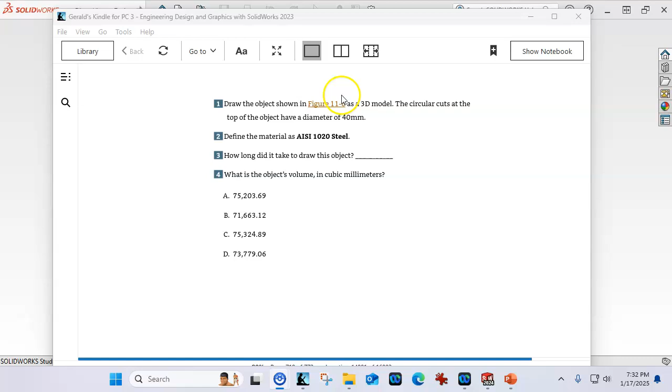So one of the things that comes up with the exam projects examples is that there are some things that have variation in size. So you could possibly, maybe these are 40 to start, and then the next question would be change all of these to 60 or shrink them to 30, whatever would facilitate the rebuild.

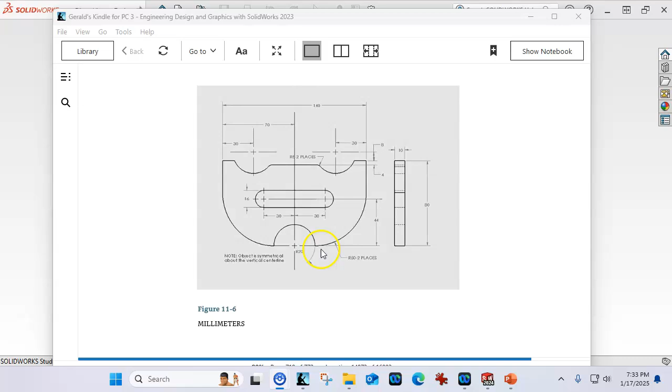All right, so we have a note that says object is symmetrical about the vertical center line, so we can draw half of it and mirror it. The slot would probably do a center point slot, and then the arc. So really the geometry that I want to create is going to be along the lines of this profile and then mirror it. So it looks like 80 on the height.

We've got an offset to that first level of 4, and then there is a tiny radius that I'm going to have to zoom up on the detail to be able to look at. Radius of 5 in 2 places. All right, so new metric part.

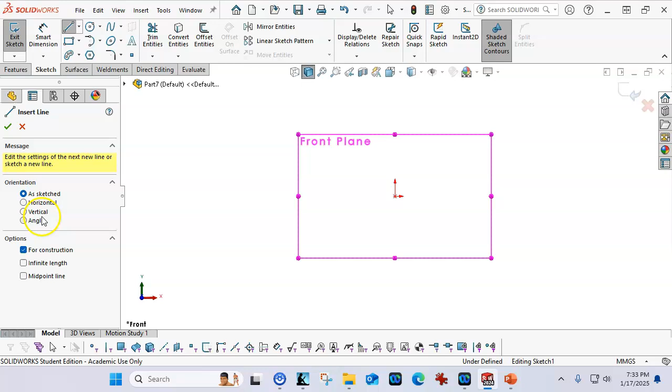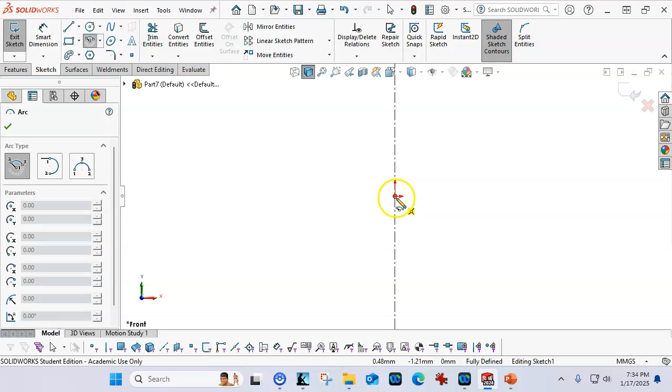First thing, whenever we're doing a symmetry or revolve, is we want to go ahead and just drop in that vertical center line and usually just escape out of it. This time we can go ahead and put in the center point arc to kind of get that started, but I don't want to take it further than that.

So I'm going to drop in a dimension real quick, that'll help me with the scaling, and the relation will go horizontal. All right, so coming out a little ways, don't know that it would be tangent. We're not really given a center point, but I think I will stay with that so that we can bring that up. And then it's going to go to lines, so L on the keyboard, and bring it up vertical, and then I can make those tangent.

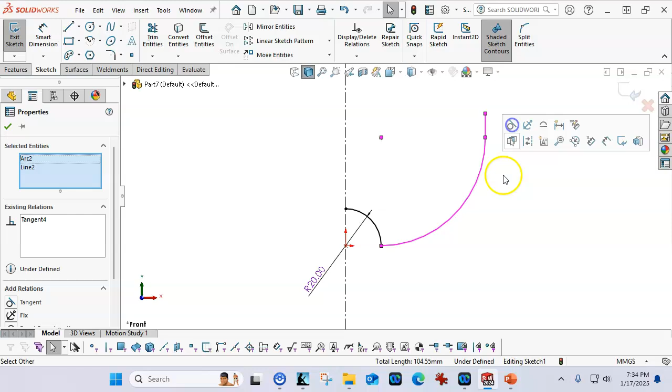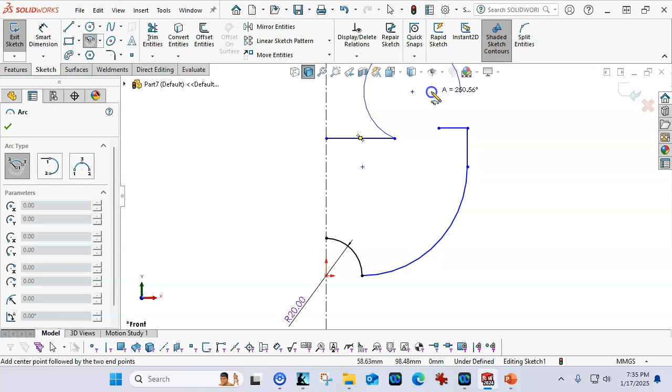All right, so that one's going to go all the way to the top, L for line again. Might as well stay in the line and bring over that segment. And we are given a point up here, so let's see if we can just go ahead and continue. So what I always end up doing with the center point arcs is if they go the wrong way, I just keep dragging them until I get it where I need it.

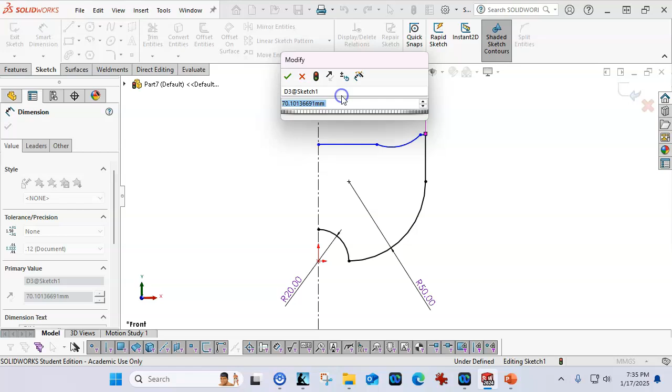All right, so radius of 50 on the lower. And then we were 70 off of the center line, so that's pretty close. We said the overall height was 80. So now when you get out of that, and we'll go back to base, so that's pretty close. And then 40 or 4, and we had a

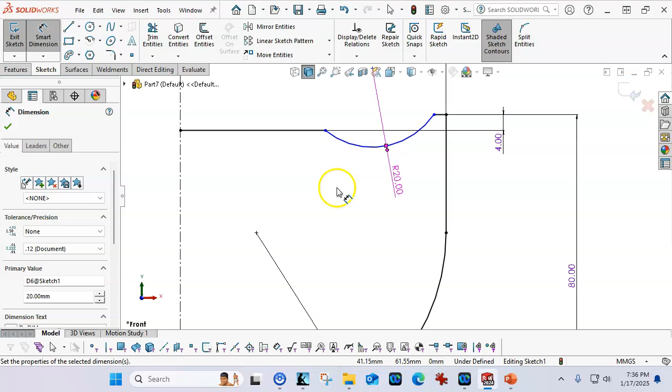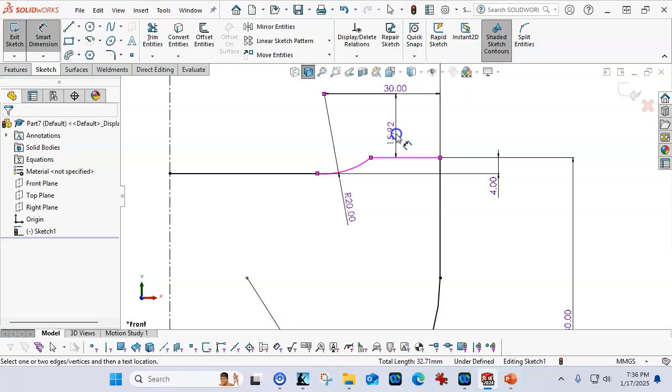want to double check that measurement. The circular cuts at the top of the object have a diameter of 40, so radius of 20. All right, so its dimension is 30 from the outside. I'm going to stay with my geometry, and then 8. I just wanted to see if it was gonna pick that.

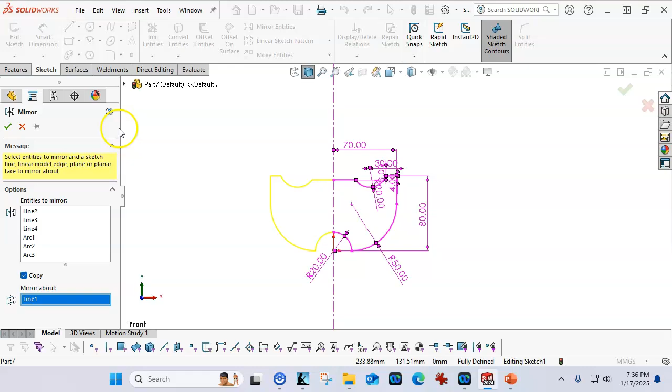So, all right. So when we window pick, we go left to right, and it grabs the geometry. If I go right to left, it grabs everything. So I do want to illustrate the left to right; we would have to go back and get the mirror about. That is handy if there are other center lines or other geometry to contend with.

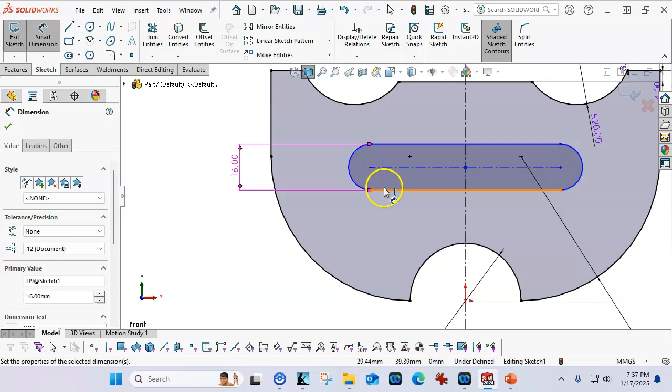So I'm going to go with the center point straight slot. And it's trying to find some other geometry, but let's go horizontal. And then we'll drop in our dimensions. We get 16 and an overall of 60. So I'm going to go with the 30 by 30. And then the distance of 44. All right, so let's see what we get.

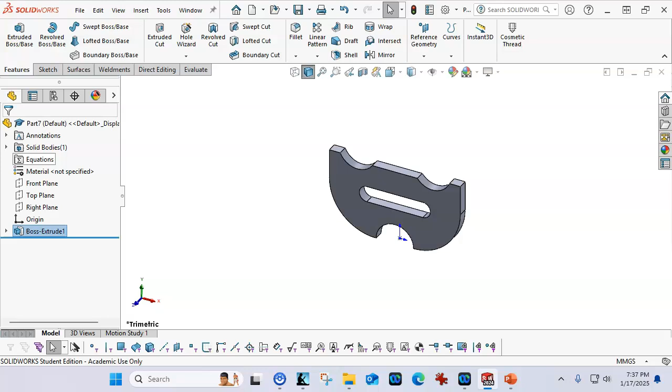Extrude out. We've got one region, so it'll go 10 millimeters. Our material, edit the material, we'll go to the search, 1020, AISI, and apply, close. All right, so our evaluate and mass properties, we'll go to the answers.

I got 75,216. Let's see if we can get that one in there. 75,203 was pretty close. And yeah, you just got to kind of come back to rounding errors, but being in metric, and whole numbers, it's kind of hard to say that there was a fractional or something.

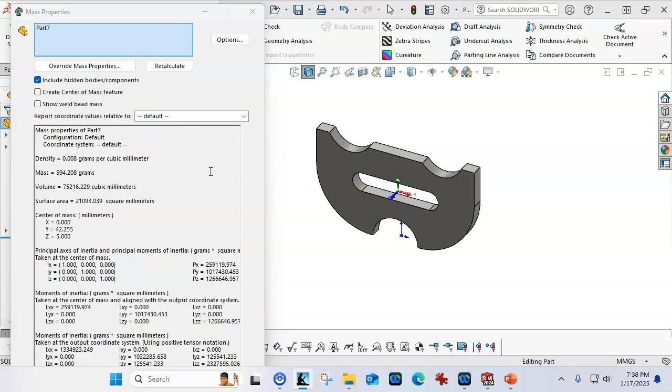Now, oh yeah, the 5 millimeter. So let's see if that 5 millimeter for two places actually made a difference. If anything, it seems like it would take material away. But that's something that I forgot, and I looked directly at it and mentioned it. So evaluate mass properties, and yeah, it went to 202. So not a lot, but it is closer to the 75,203.

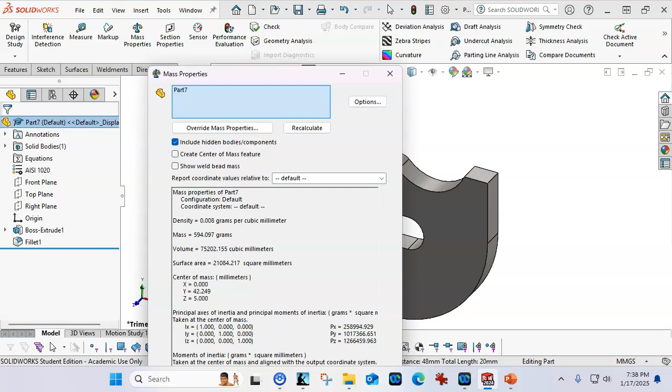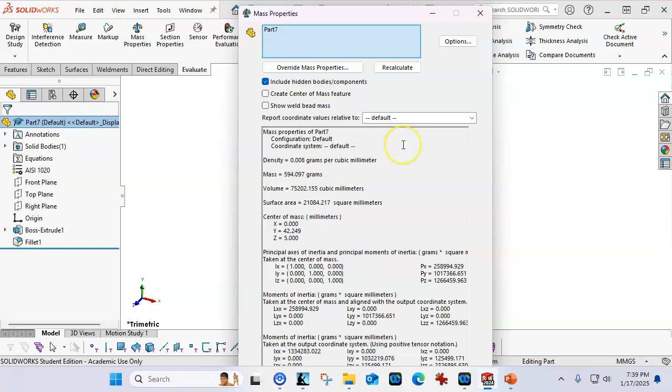All right, so not coming up. I would like to see exact numbers, but in this case, what else did we have on that? If you're playing along at home, 594.1 grams if we round that up, and then the center of mass with the origin at the bottom back. All right, so decent little project utilizing the symmetry.